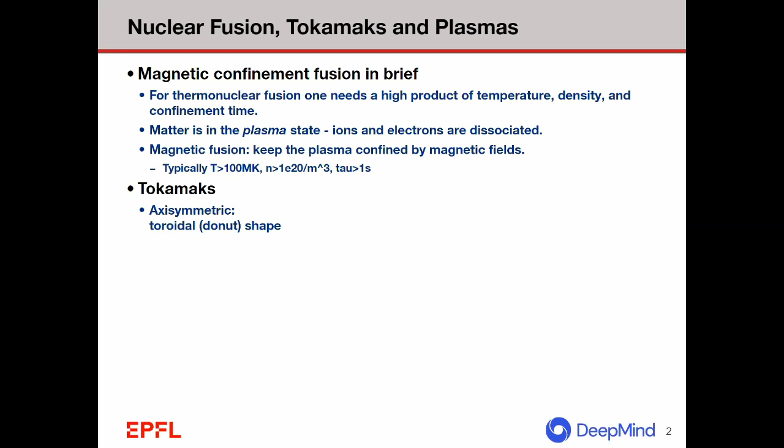And this is really nice for machine learning research, because it's able to be very flexible in the kinds of plasmas that it can generate, which means that it's very nice for doing plasma research, and it's very nice for doing reinforcement learning, so we can try to show many different things going on. And here we have various pictures of the TCV itself. First of all, situated in Lausanne in Switzerland, but also a picture of the inside of the device and the building it's housed in.

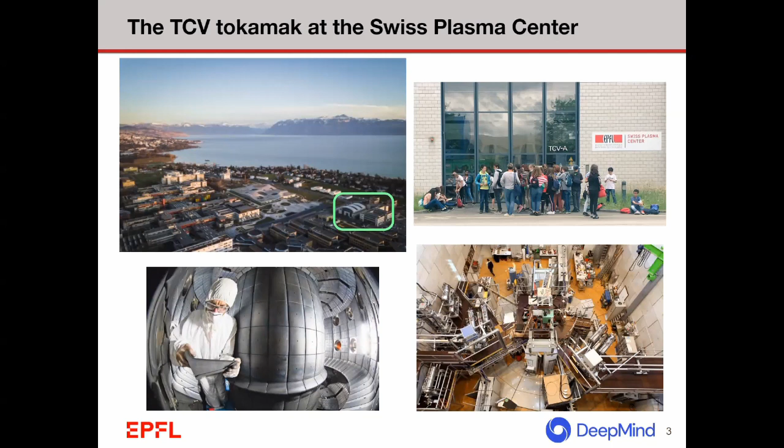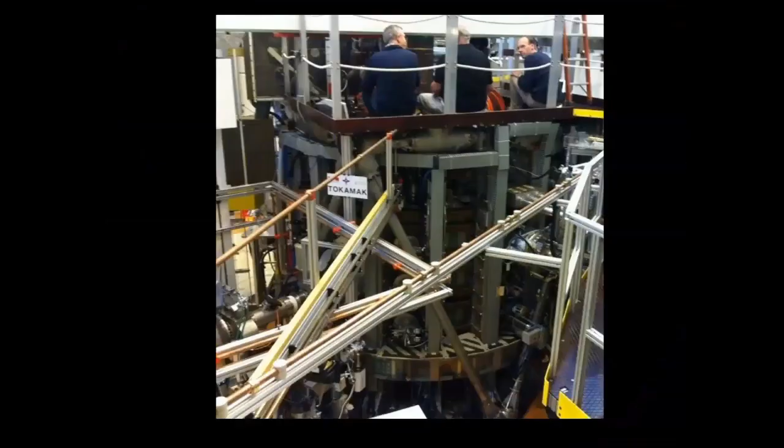And because everybody loves good pictures, here's a picture of the plasma in the TCV at once. And you'll see in a minute what this is a picture of. And again, just to give a little bit of sense of scale of the size of this device. A true nuclear production power plant Tokamak would be much bigger. But again, this is one geared towards research, geared towards trying many, many different plasma kinds to inform our future devices. And it's also really nice because it's also geared towards PhD students trying crazy things with it. So it's much more safe and hard to do anything truly bad to the device.

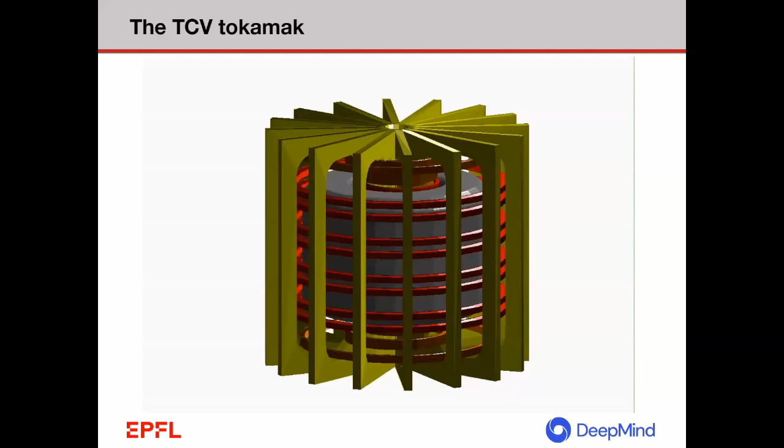So the way a tokamak works is there's two sets of coils, control coils. One set of coils is to maintain the inner current, the current that flows through the plasma; there's one set of coils that maintain that current. And there's also a set of control coils that allow us to manipulate and maintain the plasma.

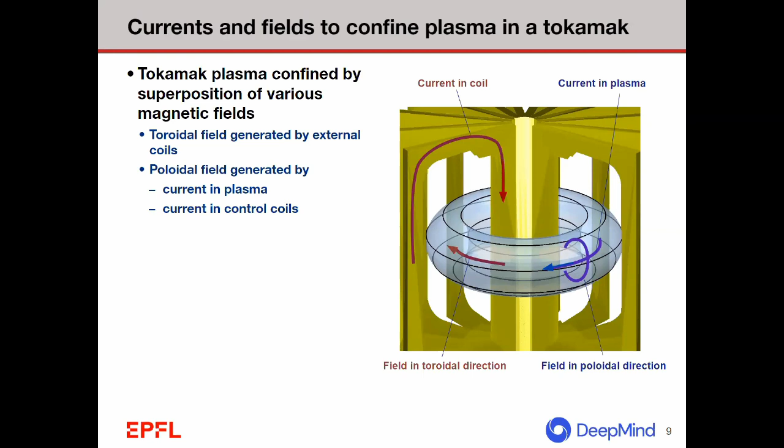And so really, as it says here, there's two different magnetic fields, this toroidal field, and then the poloidal field. Sorry, I'm doing really bad at talking about this. But anyway, the poloidal field is what allows us to manipulate, with that set of control coils there. And in the end, there are going to be 19 different control coils that we're manipulating simultaneously, both to maintain this inner current in the plasma that maintains stability, and then the other 17 coils to manipulate the shape, which allows us to change things like the density, the confinement time, or what are called the strike points, as we'll see.

So in general, what we're trying to do is what's called the axisymmetric equilibrium control. So we have the assumption in a tokamak that the plasma is axisymmetric throughout. So we're going to be showing many different 2D cross sections, and the way that the tokamak is designed also keeps this axisymmetric. And we not only want to maintain the plasma current and the existence of the plasma, but we want to control many different aspects.

Now, in the longer run, we'd really like to be able to control that triple product to maintain high density, high confinement time, and all these things. This is actually really hard to do for a variety of reasons, most notably because simulation and the science of it is really hard, which is one of the things that we're trying to develop at TCV, understanding how different aspects of the plasma affect this triple product.

In this work, instead, we're going to do the simpler problem of what's called shape control, which is maintaining the vertical position and the horizontal position of the plasma, but also controlling what's called the last closed flux surface, i.e. this black line that you're seeing around the plasma, as well as what's called the active X point. So this is kind of the attachment point of the plasma in the device, as well as where these legs and strike points hit.

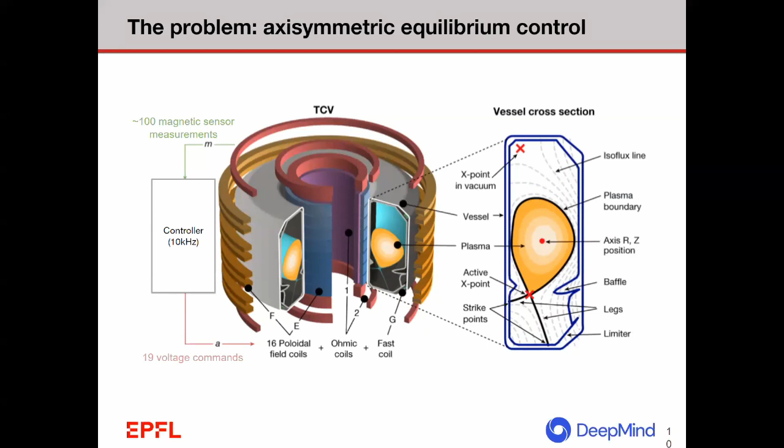Great. So one thing that's really challenging, though, is that this is actually an unstable system. We heard earlier today about damped oscillators that stabilize down nicely, but this is the opposite. In particular, the Z position is unstable. As the plasma gets more and more elongated, the Z position becomes more and more unstable. If you don't do any active control, the plasma is going to very quickly expand either up to the top of the device or to the bottom, and the whole thing is going to dissipate. In TCV, this is kind of okay, but on the next generation of tokamaks, such as ITER being built, these disruptions can be very damaging because they're very energetic. So we want to be very sure that we're not going to allow these disruptions to happen.

But also the timescales are very fast. So this gives a picture of 6 milliseconds, the sort of scale at which these instabilities happen. And you can, in fact, do it much faster than that, we can assure you. And so we want to be able to control at these very high rates. So we're going to manipulate these control coils at 10 kilohertz. That is, we're going to take actions 10,000 times a second in order to maintain the stability.

So, okay, so why would we talk about reinforcement learning? And why not just use traditional control? Well, there's a couple of challenges here. So one is that the way the traditional controllers work typically is that you have to specify kind of exactly what you want to do. So first, we're going to pre-compute a feed-forward trajectory of how much current there should be in all of the coils at every different step of time. And then we're going to use feedback control to make the actual current in the coils be that way.

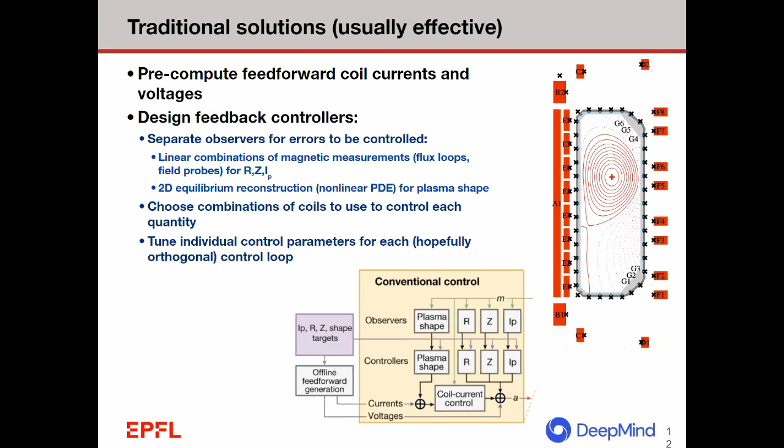So while traditional control techniques are very effective, they've required a lot of buildup over a number of years to get working in the first place. And in the second place, it makes them quite hard to manipulate and modify to do a completely new design just because of their sheer complexity. Whereas instead, in this work with reinforcement learning, we're going to remove all this complexity of all of these different feed-forward inputs, of having all these independent controllers, and instead we're going to tell the reinforcement learning system what shape we want to make. It's going to figure out how to manipulate all the coils to do that.

So instead of having all these independent boxes that need to be independently tuned, we're just going to say, here's what we want. Please find us a solution to get there. And so we're going to have one controller for all 19 coils at the same time. We're not going to use any of these feed-forward generations.

And what I didn't mention on the previous slide is that if you want to do shape control on a traditional controller, you need to have feedback about how wrong the shape is. On the one hand, that's kind of fine. But on the other hand, it means that you need to be able to estimate at 10,000 frames a second how wrong your shape is. And it actually required a lot of effort for them to make a feedback controller even possible on this system.

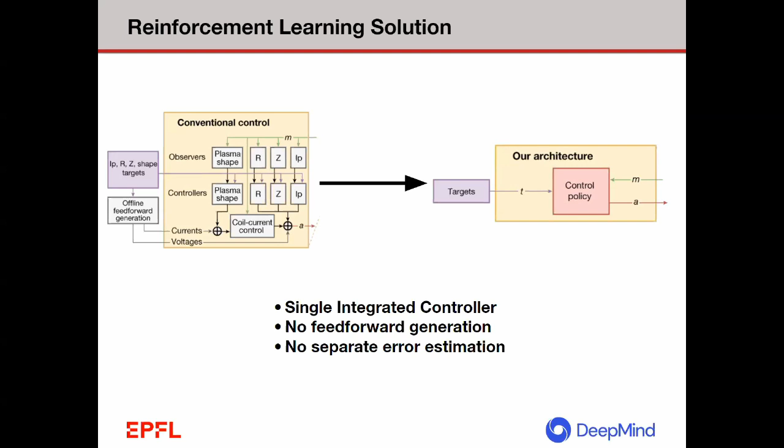Whereas in our case, we're going to basically push all of the complexity of the reconstruction into the agent itself, and it's going to learn how to do that on its own. So it's going to learn how wrong its own shape is from the measurements directly.

So for those of you who might not be familiar with reinforcement learning, it's kind of a different branch of machine learning. So as we've seen already today, there's many supervised learning examples where we're trying to predict outputs from a set of inputs. And we've also seen some unsupervised learning examples where we want to do things like classification and clustering in order to understand what our data looks like. In reinforcement learning, we're basically going to teach a system how to work through interaction with the environment. And so it's going to learn through trial and error.

And one thing that really separates reinforcement learning from more common, say, supervised learning approaches is that the agent needs to generate its own data to figure out how to do well. So the first time an agent interacts with the environment, maybe it does really, really poorly, and you say that was a bad job. Well, the next step, it needs to figure out how to do something different to try to do a better job. And so it needs to both understand what it means to be good, which is kind of like in the supervised learning case, but also understand how to generate data to make sort of good trajectories and good outcomes exist.

And so trying to generate this feedback loop and do this feedback loop correctly is sort of what reinforcement learning is about. And in particular, we're going to have this agent environment interaction loop where, at every time step, the agent is going to take an action. The environment, which for now is going to be sort of abstract, we're going to eventually see it's going to be simulation, but then we're going to run on the real Tokamak. And so in that case, the environment is going to be either of these really. And on the outcome, the agent is going to get a whole bunch of observations about the state of the world. And during training, the agent will also see a reward, which is defined by us as to how good of a job it's doing.

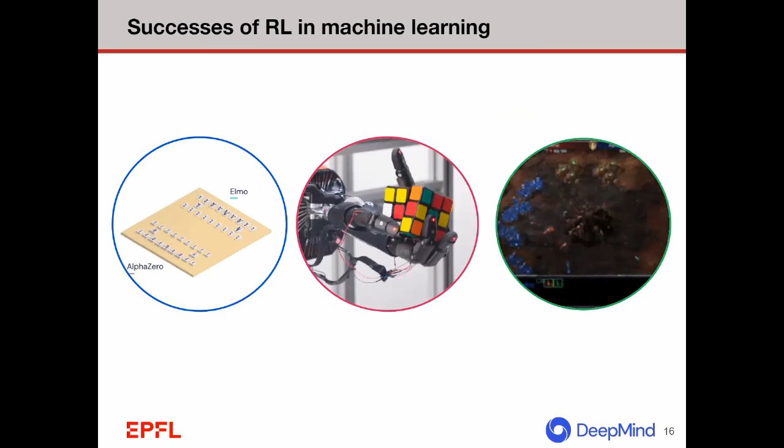So reinforcement learning in general, I probably don't need to tell you, but it's been used in many cases. So if we think of this AlphaZero work from DeepMind, the reward signal was, did you win or did you lose at chess or Go, and they didn't even need to know explicit environment dynamics. The agent figured out itself what the rules of chess were while it was playing, and then also how to be very, very good at chess, only from the signal of did you win and did you lose.

And similarly, we see that the input space is very discrete. Like where are the pieces, which pieces are they, on what points are they on? And same thing, the action space is very discrete, which is which piece you're going to move where. On the flip side, we take something like this work from OpenAI, using a humanoid hand to solve the Rubik's Cube, where here there was a visual input. The outputs themselves are very continuous.

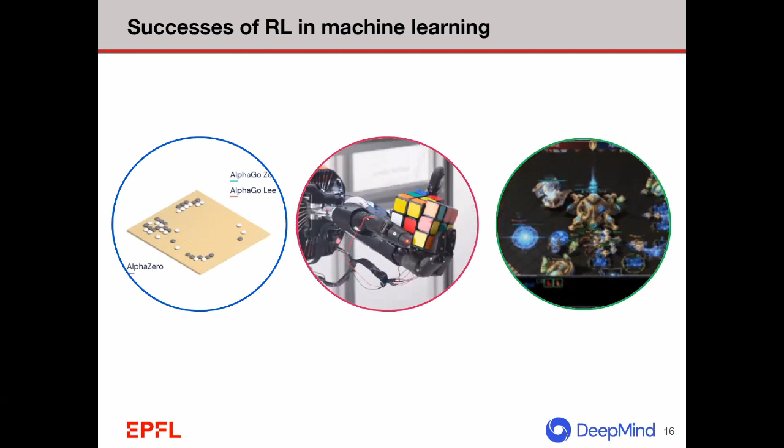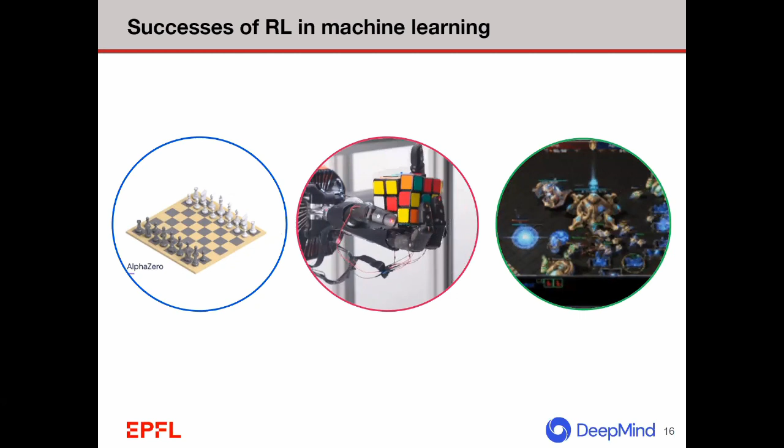And then we have something like the StarCraft work, AlphaStar from DeepMind, where again, there's very, very many different kinds of inputs and a very complex output space. And reinforcement learning is able to work on all of these domains, which is one thing that makes us at DeepMind quite excited about reinforcement learning and the future there.

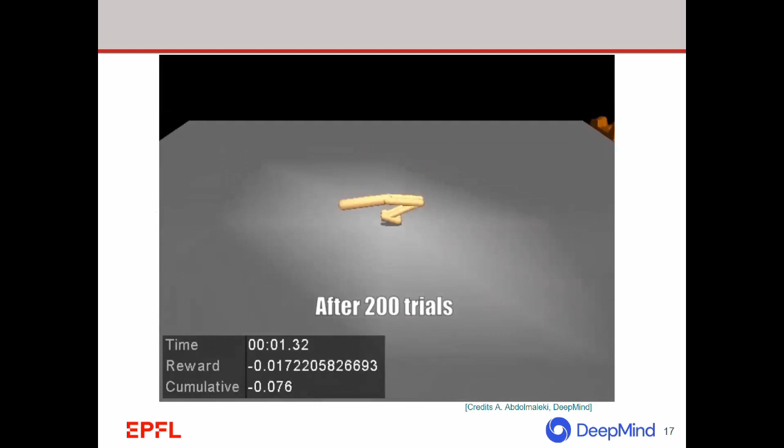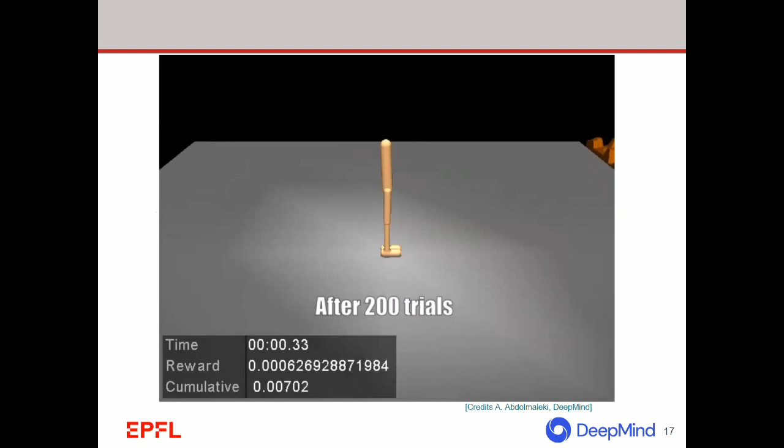So just some fun videos of how this can work. So here we have a quote unquote humanoid walker, and its reward is to see how far it can move in the space and quickly. And after a couple hundred trials, it's really not doing very well. It barely can stand up. I mean, let's be honest, it can't even stand up. If we let it run for 2,000 trials, it's able to start moving forward, and it's at least able to make it off its first plank, but then once the terrain gets to be a bit tricky, it fails.

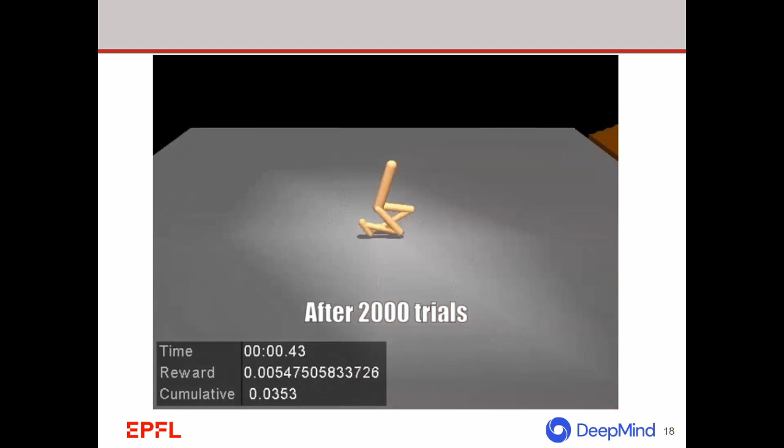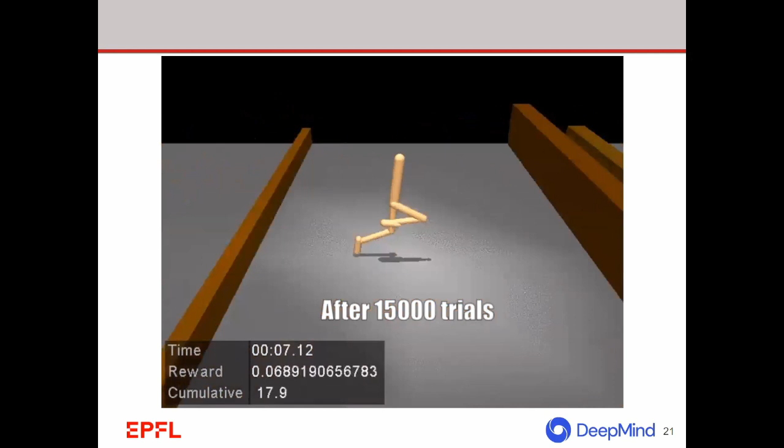We move forward with training. Now at 6,000 trials, it's all of a sudden able to start jumping and understand how to move. At 8,000 trials, it can jump over small walls, and it's fairly impressive. And then finally at 15,000 trials, it's able to move very quickly over very different heterogeneous environments. And so this gives a sense that even with a simple reward function of get farther in the world, it's able to learn very complex behaviors.

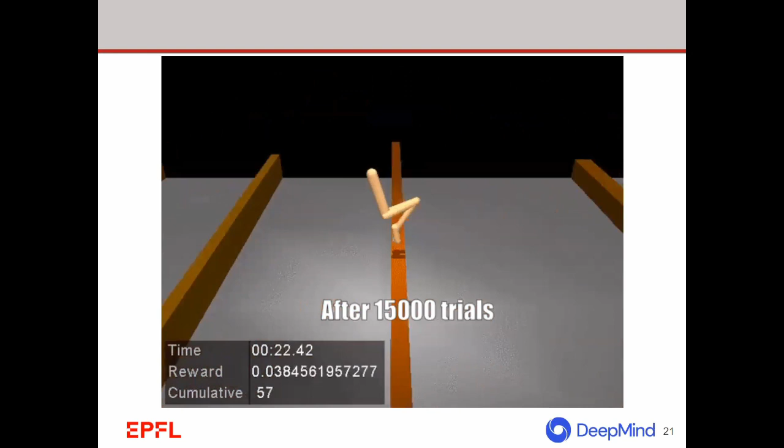And this work is from 2015, and all of these things have gotten so much better since then. And that's one of the places where we started to see, oh, maybe this is now ready for the real world.

So great. So I told you in general about reinforcement learning, but what do these components look like for the Tokamak system? Like what are all of these things? So as I mentioned before, an environment mathematically is something that can give the agent an observation and also return a reward.

So the real thing that we want is we want to run on the Tokamak and control a bunch of things. And our observations are going to be a set of flux loops and magnetic probes, which are both sort of two different measurements of the state of the magnetic field in the Tokamak. And we're also going to measure the current of the control coils. So there's 19 control coils, but there's one redundancy measurement between two of them, and so we're going to observe all 20 of those coil current measurements, even though there's only 19 of the coils.

One thing that you'll notice that's not here is that we can't actually directly observe the plasma. We can only observe the magnetic field. And so the agent is going to need to be able to infer, given that this is the state of the system, what does the plasma actually look like?

So the agent itself is one way of doing this, but there's also a sort of more first principle scientific way where they can find a reconstruction of the data. So in the future, when I show you videos, some of the videos are optical, but any of the non-optical videos that I show you are going to be reconstructions of what the plasma looked like, essentially doing a complicated, physics-based least squares of what the plasma must have been in order to generate those measurements.

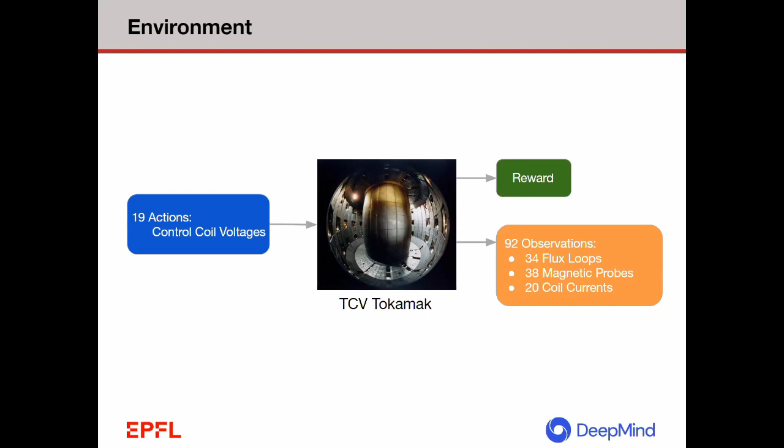Now, in practice, we would love to be able to learn on the Tokamak itself, but this is just totally impossible. So first of all, it's an unstable system. So if you have your agent who's never seen a Tokamak before, it really loses the plasma in a couple of milliseconds, which even at 10,000 frames per second, 10,000 actions per second, only gives you like 20 or 30 data points, right? So it'd take forever in order to learn a reinforcement learning system from scratch.

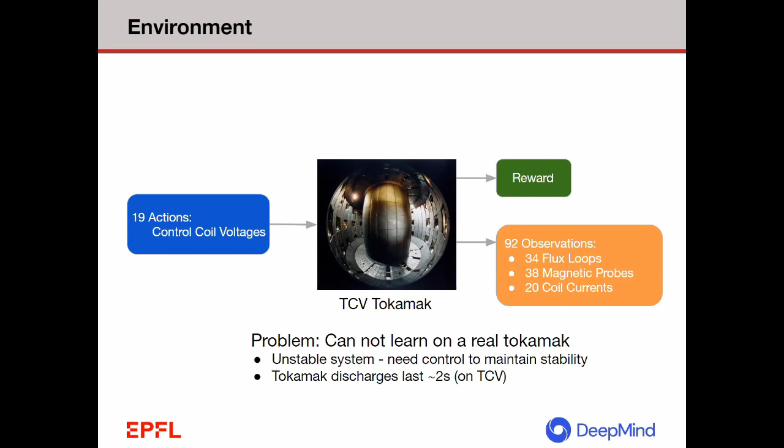Similarly, the Tokamak discharge, even if you're doing really well, only lasts about 2 seconds. And actually, through the whole course of experiments writing this paper, we had less than 2 minutes of actual experimental time on the TCV Tokamak for all of our experiments doing everything. And unfortunately, today reinforcement learning is still very, very data hungry. So this is just totally a non-starter for learning on the device itself.

So what we're actually going to do is we have a simulator that's called FGE, which stands for the forward Grad-Shafranov evolutive, meaning that it's a model of the plasma, which is the Grad-Shafranov equations. Basically, for reinforcement learning purposes, this is a very expensive environment to run on. So the previous Walker experiments I showed you, I don't know the exact numbers, but it's maybe like 1/100th of a second per step, whereas this is more like 2 seconds per step.

But from a plasma perspective, these Grad-Shafranov models are very, very simplistic and are sort of as simple as they need to be in order to do this plasma shape modeling, but no simpler. And so basically the system is these Grad-Shafranov equations for how the plasma manipulates, plus these circuit equation solvers to model a coupling between the control coils and the plasma itself.

And so to be a little bit more simplistic, right, the plasma is manipulated by these control coils because it has an internal magnetic field. And similarly, the internal magnetic field of the plasma influences the control coils back. And what this simulator does is simulate how the magnetic field evolves in time as a combination of applying voltages to the coils to manipulate them and those coupled interactions with the plasma. Great. And what this simulator does then is it simulates, given the voltages we take, what are the observations we're going to make?

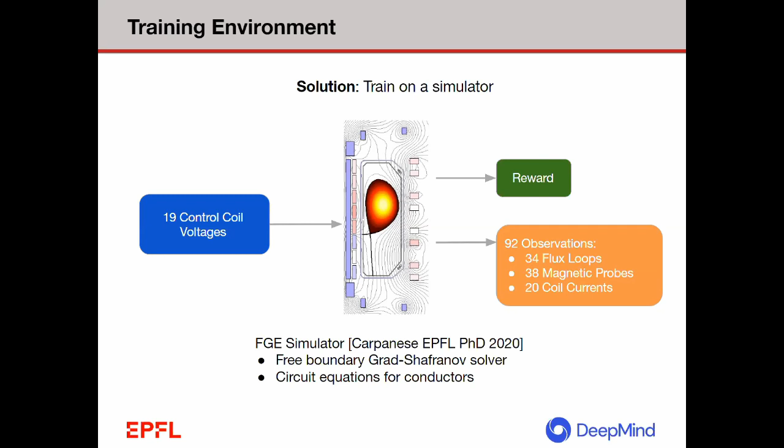And so just to say, right, I promised kind of at the beginning that we have this nice fully integrated system, but it's not true that we're getting rid of physics and we're not getting rid of the need for the understanding of physics, right? All we've done really is we've pushed the complexity from sort of real time, to do these traditional control really, really fast, to instead pushing it into a simulator where we can run this many, many times offline in a computer experiment.

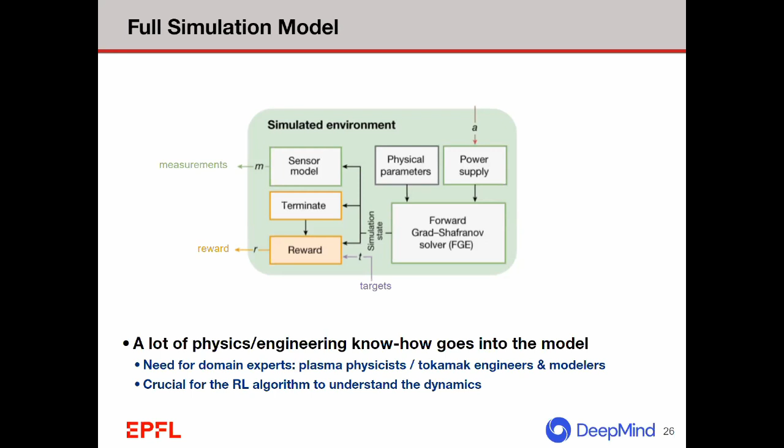And then what we're secondly going to do is have the complexity of now, given that our machine learning agent has only ever seen simulated states, how do we get it to run on a real Tokamak? And in the end, what we're going to do is what's called zero-shot sim-to-real transfer. That is an agent that's never before seen any real hardware data, and we're going to run it on the hardware anyway and get it to work there.

Great, so what are we actually trying to do? Well, the first thing that we want to do is we want to keep the plasma alive. And so what we're going to show now is one of the first videos that we ran on the tokamak itself. And this is 0.024 seconds of real time. And we see that our very first experiment that we ran, you can really see right there that wobbling from the unstable oscillation, and it loses it.

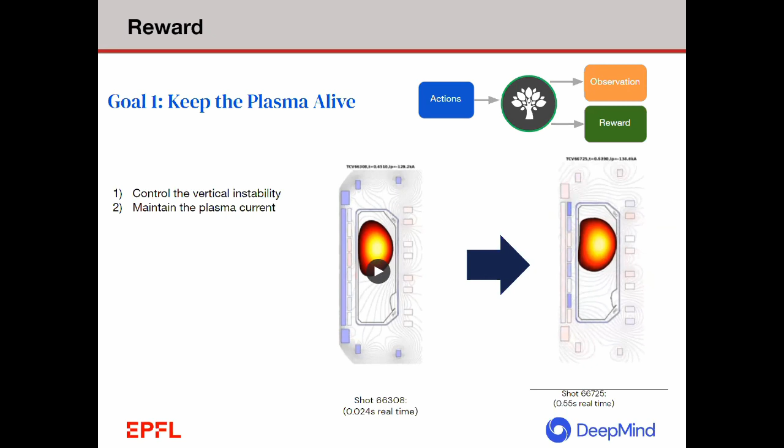But we managed to figure out a whole bunch of things that were wrong between the initial result and this result here. And now we're watching something that's a half a second of real time. And sure, it's a little bit wobbly at the beginning, but we are very excited to see that it's actually able to hold the plasma together for a half a second shot. And this half of a second was only there because for this particular experiment, it was set to cut off after a half a second. So the agent was able to stabilize for the full window that we gave it, which was very exciting.

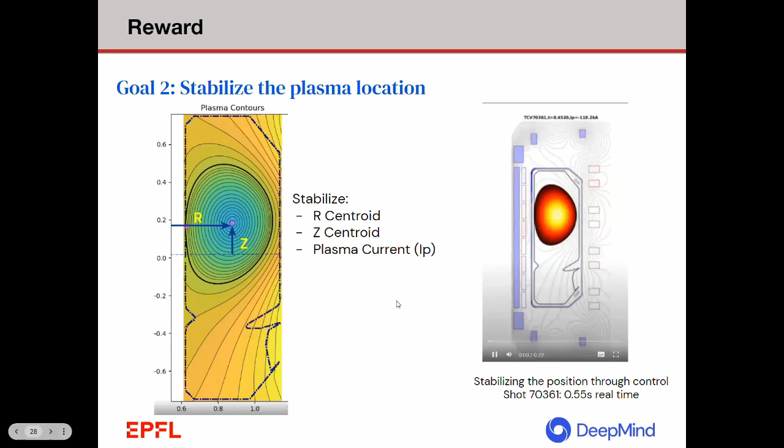The next thing that we try to do is, rather than just keep the plasma alive no matter what, we want to stabilize the location of the plasma, that is the R centroid and the Z centroid in place. And so again, here's another experiment at a half a second of real time. And here we go. Now, on the one hand, I'm going to say, look, great. Look how stable that R and Z position are. This is sort of exactly what we told it to. This is great. Many of you are probably thinking, but wait a minute, didn't it just totally manipulate the shape there? And this goes back to what I said before about the blessings and the curses of reward functions.

Which on the one hand is exactly what we asked it to do. On the other hand, from the perspective of generating plasma energy, higher elongated plasmas are much more interesting because you get much more plasma for the shape of the tokamak that you're building. And so this in the end isn't what we want.

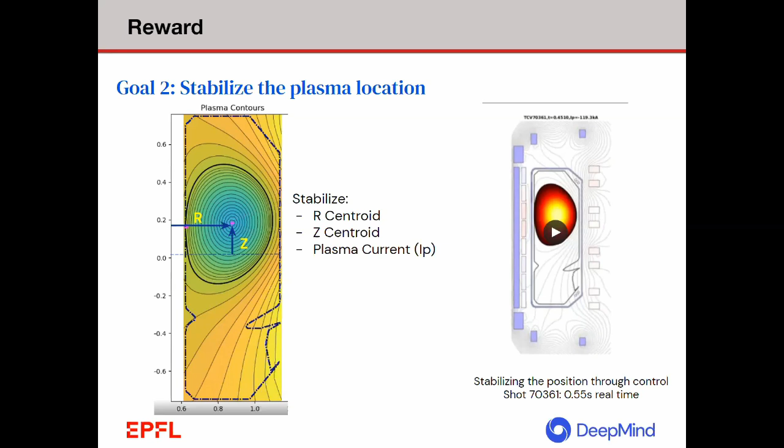And in addition, we're not just going to maintain one static shape like this image shows, but instead we're going to give the agent a full time trajectory of what it should be doing. So at every millisecond in time, we're going to give it values for all of these quantities to control, and then we're going to try to see if it does that.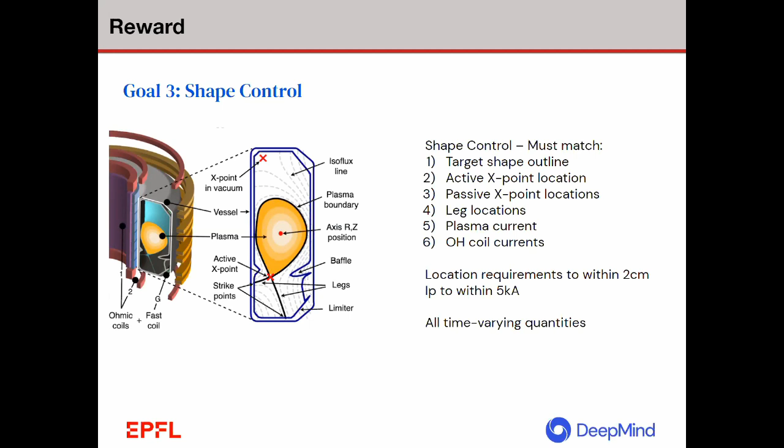But until we get there, let's now talk about the agent and how we're going to do the training. So now we know what we're training on and what we want to do. How do we actually do that? So the agent is basically the other half of this thing that takes in an observation and a reward signal, and then it's going to output what actions we actually want to achieve.

And our goal is we want to find the optimal policy, and we define optimal policy by maximizing the discounted sum of future rewards. So that is, given the state that we're in, which is the observations, and in our case, the targets of what we want to achieve, it's going to output an action to achieve. And in the particular way that we're doing this, at every step, actually, the agent is going to output a distribution of actions. And this distribution of actions is first going to allow it to explore while it's doing the training, to try different things.

And then when we deploy it on the actual tokamak, in practice, this is going to be a Gaussian. And so we're going to take the mean of that Gaussian when we actually deploy in the tokamak to make sure that we know what we're going to be trying. And so what this particular reinforcement learning algorithm does is it's going to be working on this Q function, which is the prediction of the discounted sum of rewards given a particular state and given an action that you're going to take. And we're going to be modeling this Q function over time.

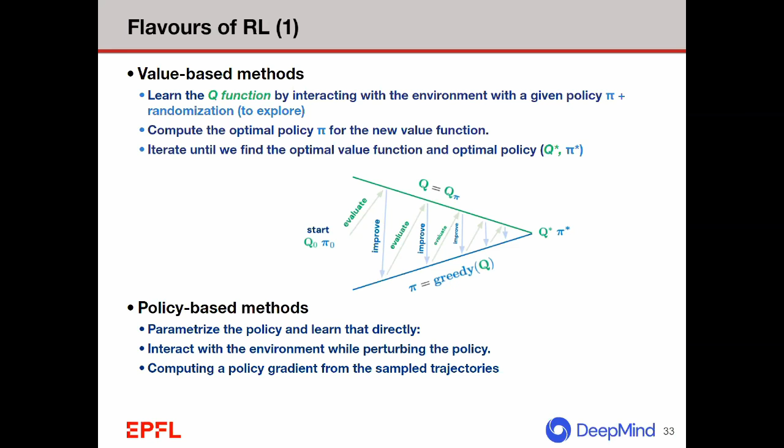What we're actually going to do in this work is we're going to use actor-critic methods, where we model both of these things at the same time. And this has a couple of advantages. So to reiterate, we're going to have one neural network that models the Q function, and it learns the Q function based on the data that it's getting from interacting with the simulated environment. And then we're going to have a second neural network, that's the policy network, that tries to match the policy with what the critic says a good Q function is. Or another way of saying it, the policy tries something, and then the Q function of the critic says that was good or that was bad. And similarly, the critic is also watching lots and lots of stuff to see what's good and bad.

And this has advantages in terms of stability and being able to train for continuous spaces, definitely, and especially high dimensional spaces. But another really important thing for this work is that it allows asymmetry between the two actor-critic networks. So in particular, the actor network that outputs the policy needs to be able to run real time on the plant, and therefore needs to be really fast, needs to be able to execute at 10 kilohertz.

Whereas a critic policy actually can be a really large network. In this case, we're going to use an LSTM core to model all of the long-term dynamics. And the critic cannot run at real time, but it also doesn't need to, because the critic is only telling us what's good and bad. And by the time we're actually running an experiment, it's too late for that. We just need the fast part to run. So we're also going to really take advantage of this asymmetry to be able to run.

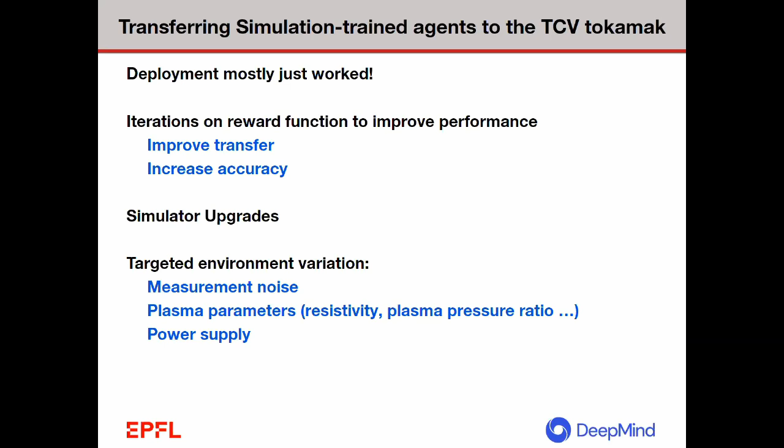We then ramp the current up in the plasma from about 60 kiloamps all the way up to 150 kiloamps. We then show that we can elongate the plasma to a useful shape. Then we can shift it down in the device. Then we can do what's called diverting the plasma to keep it off of the walls in the middle of the shape. And then finally show that we can bring it back up to a safe position and reduce the energy in the plasma down to a safe level before we let the plasma dissolve on its own. So basically showing that we can grab it after initialization, control it to a shape that we want, and then safely dissipate it so that you don't do any damage to the device.

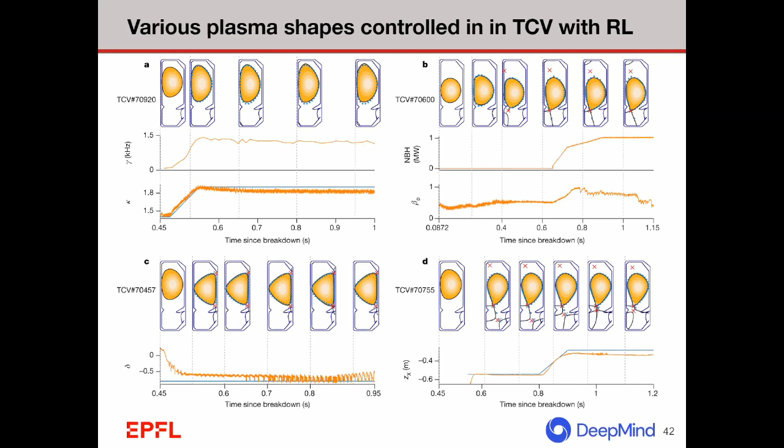Similarly, this is a snowflake shape where we see there are many legs that divert the heat to a number of different places. Rather than having one part of the tokamak that receives a lot of heat, maybe you can spread it out. And then lastly, we showed that we could do something that's called a droplet, where we have two different plasmas in the domain simultaneously.

Now, it's probably true that you could do this with traditional control, but in order to do this, we would first of all need a new simulator that could simulate multiple plasmas. Okay, we needed that too. But then you need to figure out how to make it fast, so you're doing it at 10,000 frames a second. You need to figure out how to tune all these control techniques, how to do all this feed forward current generation, all these things that we need in the traditional sense.

And no one's ever done a droplet before, so you'd need to redo this from scratch. Instead, what we did is we changed the reward function to say before you wanted R and Z of one thing, now you need R and Z of two things, and then we just run it. So this kind of shows the major advantages. And this is the first time anyone has ever sustained a droplet on a tokamak. And we were able to control both the current and the location, which we're very proud of.

So to summarize, what's really nice about our approach is we have a single reward function where we get to specify what we wanted. Although we also found, as a downside, that we did do a fair amount of tuning of all the different techniques. Like we wanted to control the current and the shape and the X point. We did a fair amount of tuning to get those things to be balanced. We also were able to do the whole control thing in one integrated loop, getting the domain knowledge from the simulator, but not needing any sort of real-time estimation.

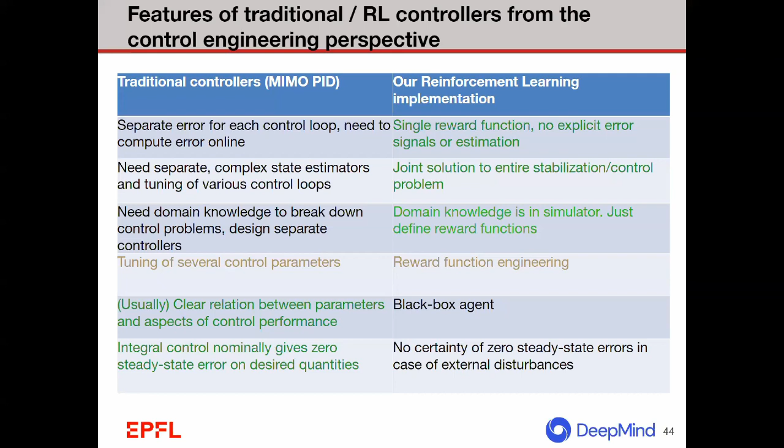I think the benefits of traditional control that we don't have at the moment are a clear relation between the parameters. So maybe you have the integral gain controller that an engineer just knows what that tuning means, whereas this kind of tuning doesn't exist today for reinforcement learning. And similarly, you can do things like make sure that the error is approaching zero as time goes on. Whereas in our implementation today, basically if the agent's like, I'm doing well enough, I don't care if I'm off by a half a kiloamp or 0 kiloamps, they all give me a high enough reward, so I'm okay. So these are things that we'd like to improve in the future.

And so, in general, I think we're really proud of this work because we think it's one of the more complex places where reinforcement learning has been applied to a real problem. And it's true that in this particular domain, traditional control is already really effective, but we think RL has a number of interesting advantages here that we were able to demonstrate, and we're hoping to push these forward both in the plasma domain and otherwise.

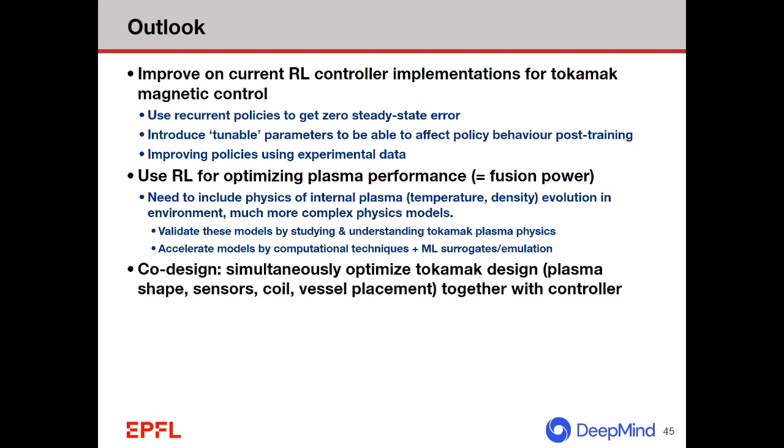And another thing that we're really excited about is this also has a potential to do what's called co-design. So if you propose a new tokamak shape, you can run a controller and see how well that tokamak system will go. And even if in the end you want to use traditional control for its advantages in stability and understandability, you can still use reinforcement learning to understand what a controller could look like, and that's very, very automated. And so you could run these design loops.

And yeah, so we think it has a very bright future for RL being used in the real world. And lastly, I'd like to say that this is a very successful multidisciplinary collaboration, which I think is especially important here. Like, there were many times where our agent was doing something wrong, and I can say, no, your simulator is fine. This is our agent doing something stupid. Let me fix the way that this training control works.

There are other times where they were able to say, no, the problem is that you set RP to 5 times 10 to the 6th, and it should be 4 times 10 to the 6th. Let's fix this in the simulator. So being really able to do this multidisciplinary collaboration was very important and have a very tight coupling. And so I think it also shows the benefits of these true multidisciplinary collaborations as we want to bring machine learning approaches to these more scientific and, from my perspective, real world domains.